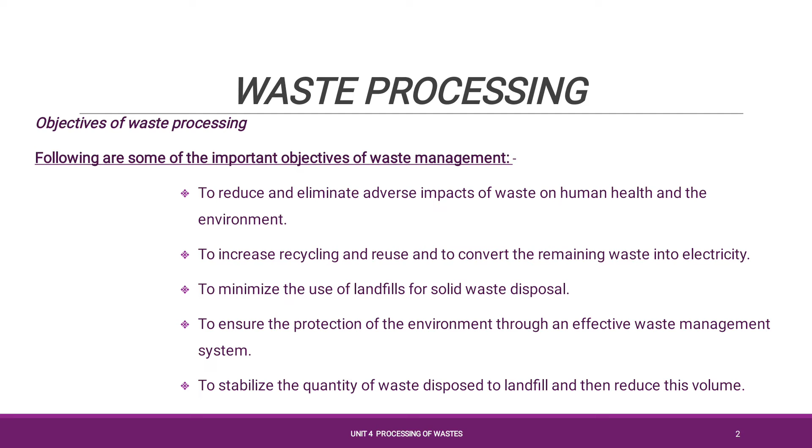Next, physical processing techniques and equipments. During the processing of the waste, we focus on the proper functioning of the solid waste management process. In order to have proper functioning of solid waste management, we need to choose perfect processing techniques and equipment for pre-processing each element of the waste which was generated.

The major purpose is to improve the efficiency of waste management, for example shredding, sorting, hammering, milling, etc. And then recovering the material that can be reutilized, and also the recovered material which was pre-processed to energy as well as chemical products, etc., so that this waste can be managed in a well manner.

So the various techniques and equipment used for pre-processing of the waste are mechanical volume and size reduction, component separation, air separation, magnetic separation, screening, and drying and dewatering.

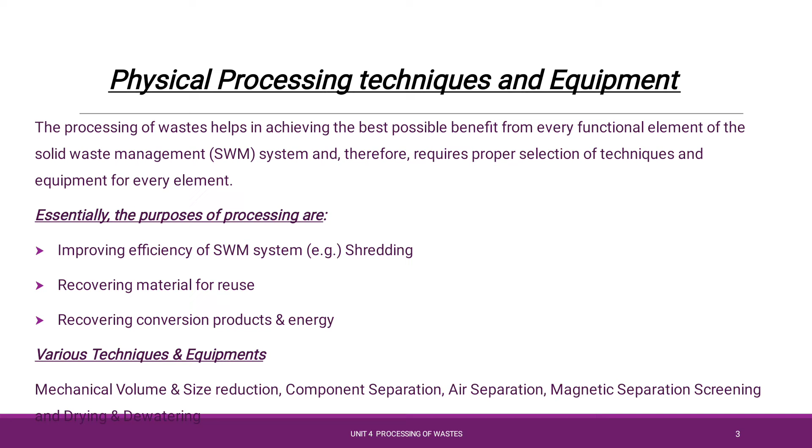First is mechanical volume and size reduction. While considering mechanical volume and size reduction, the main focus is to reduce its volume as well as size, so that the component is changed from its original form. The product formed after the reduction of volume and size will be in a uniform state of condition.

The major volume reduction is done by means of compaction technique. The compaction technique focuses on reducing the volume and has some benefits such as reduction in quantity. The collection efficiency of the process can be improved. The landfill life has been increased, and the waste management can be economically monitored and economically feasible on a real time basis.

Even though it has a lot of advantages, there are some disadvantages: if proper recovery of waste has not been done prior to volume reduction, improper compaction may occur, and the recycled material may interfere in the further course of sludge management practices. Also, the biodegradable matter must be destroyed prior to properly managing the waste, since valuable paper or plastic material existing within the organic wastes may interfere with the digestion process and may affect further treatment of the solid waste.

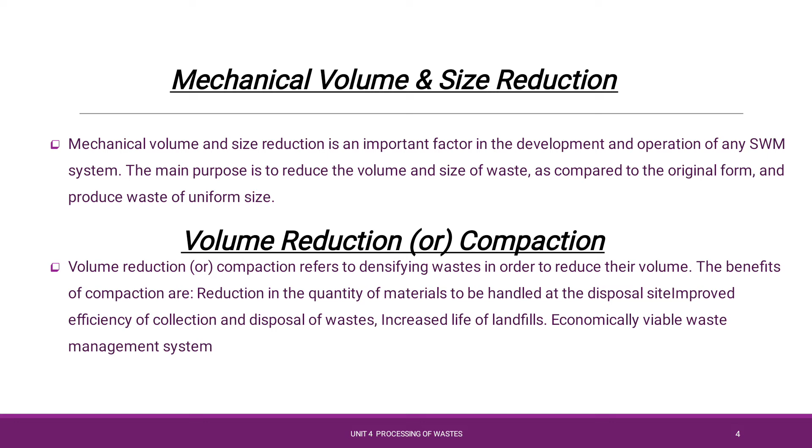So mostly the equipment used for compaction are the stationary as well as the movable equipments.

While considering the stationary equipment, the waste has been collected and stored in the bin at the point of the stationary collection bin. Usually steel containers or compressed blocks are used for the collection of process waste. The collected waste is transferred by means of hauling apparatus and transport vehicles to the site of disposal or the transfer station.

The movable equipment, such as the bin kept for the collection of waste, is provided with wheeled and track set apparatus so that the waste can easily be moved to the sanitary disposal site.

During this compaction process, two sets of pressure are implemented: low pressure and high pressure. Low pressure is highly utilized for stationary type compacting equipment. Here, the pressure provided is less than 7 kg per centimeter square. Usually the waste compacted here is light in weight material.

High pressure compaction is provided for highly organic substances with more moisture content. The pressure provided here is above 7 kg per centimeter square.

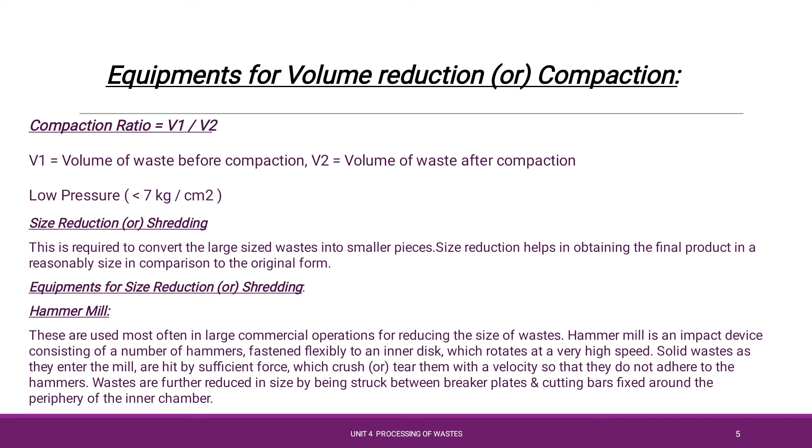When solid particles are forced to fall within the hammer mill, the solid waste gets shredded into the proper size between the plates, and it continues to form smaller particles. Thus, this hammer mill technique can be implemented for size reduction.

These blades are mounted on the bottom of the unit in the rotor, which converts the material into slurry with a solid content of 25 to 35 percent.

The next method of separation is component separation. In this component separation, the waste is identified and segregated, and is stored by means of mechanical process or manual process for further processing of those waste.

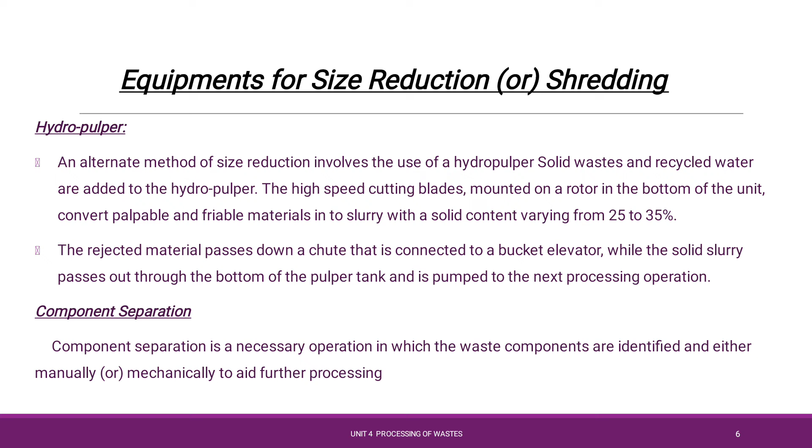So during this process of component separation, the valuable materials are recovered for recycling purposes, and the material can also be carefully selected and utilized for energy recovery operations, composting, and incineration. The effective method of separation is manual sorting. It is usually done for the household collection system.

Another type of component separation is the air separation process. This is usually utilized in industrial operations. In this air separation process, the lighter materials are separated from the heavier ones. The materials separated here are paper, plastic, paper products, organic material, etc. In order to separate the light fraction organic material, a proper air stream has to be pumped into the cyclone separator, and the heavy fraction is removed from the air classifier and finally disposed of in the landfill disposal site.

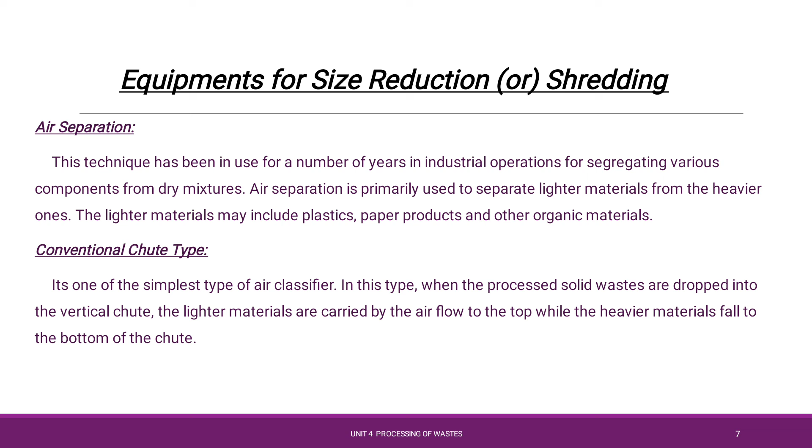In air separation, two types of method are available: the conventional chute type method and the open inlet vibrator type. The conventional chute type method is highly utilized. In the conventional chute type method, the solid waste is dropped vertically within the chute chamber while the air flows from the bottom to the top. The heavy flow of air causes the separation of the lighter weight material, and the heavier material falls down to the bottom of the chute. There will be a controlled handling of the light and heavier material during the conventional chute type method.

Next is magnetic pulley. Magnetic pulley is the process implemented during the magnetic separation of waste. During magnetic separation, ferrous scraps are usually recovered. A drum type container is utilized for separating the magnetic substances. There will be a permanent magnet or electromagnet provided in the conveyor belt which transfers the waste stream. During this transfer, the magnetic substances are attracted and retained within the chamber, while the remaining solid waste, free of metallic components, falls out of the stream and can be separated for disposal.

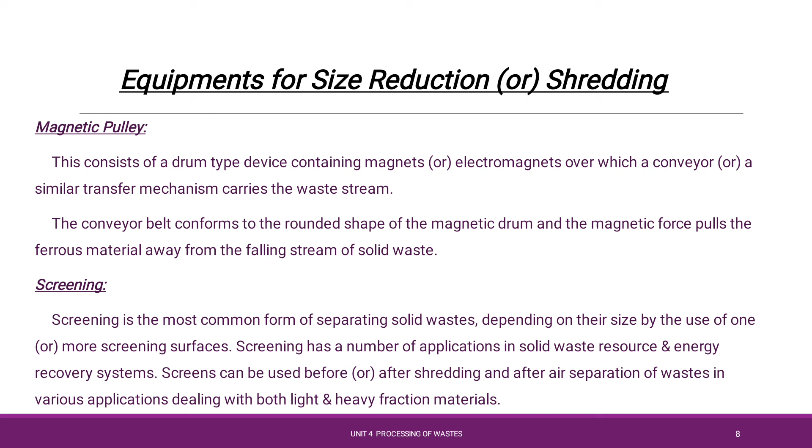The next technique is the screening method. Screening is a commonly used separation process, usually done based on the size of the material. Screening has a number of applications. It is highly utilized for the recovery of useful products and the recovery of products for energy purposes. Screening is usually done before or after shredding and after air separation. In the screening process, heavy and lighter materials are properly screened and removed.

Next, drying and dewatering. Waste is separated in a dry form, and wet material can be dewatered and reutilized. The moisture content should be removed initially for efficient waste management. Dewatering is the major process for waste taken for incineration, because the dewatering stage improves the efficiency of incineration, so that the waste can be transported to the final disposal site.

Convection drying, conduction drying, and radiation drying are highly implemented. In convection drying, hot air is directly pumped into the wet stream so that the moisture present gets vaporized and removed. In conduction drying, the wet solid waste is kept on a heated surface, so the moisture gets removed by evaporation. Radiation drying is done by applying heated body radiation to the wet solid waste, so that vaporization of the moisture present in the solid occurs.